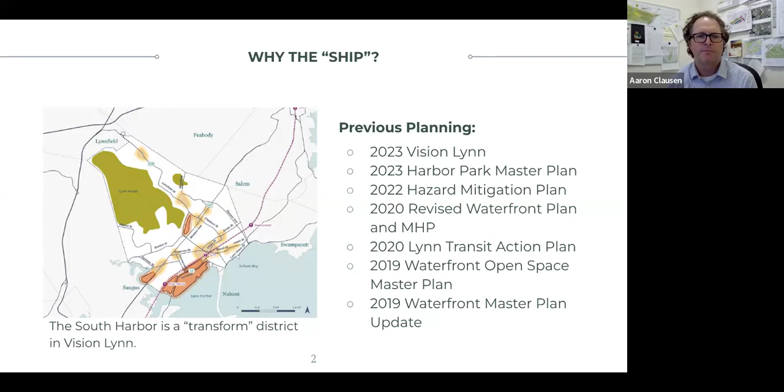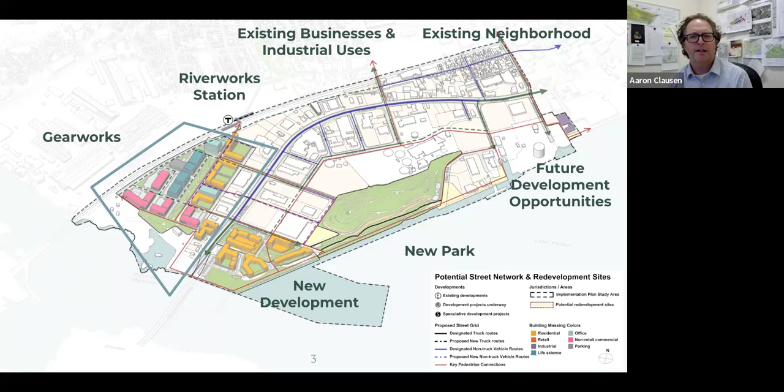The process, as I alluded to earlier, involved hiring Utile, a planning consulting firm that does this kind of work and actually carried out the Vision Lynn process for us. They've also hired subcontractors, Tetra Tech and Landwise, to look at infrastructure in more detail and look at the economics of this development, ensuring the strategy we're developing is feasible and considers those needs, so that growth happens in a logical way but is also feasible from a market perspective.

A lot of this work goes back to those previous plans I referenced earlier, to see what's still relevant, understand the context and history of this visioning work in the city, and then engage stakeholders, property owners, businesses, and residents to hear their desires and understand how their perspectives align with the visioning that's gone on, ensuring the strategy is consistent with the community's needs and wants. We've done this through community meetings, neighborhood walks, and reaching out directly to stakeholders for one-on-one conversations to make sure we're getting a diverse perspective on how this plan gets developed.

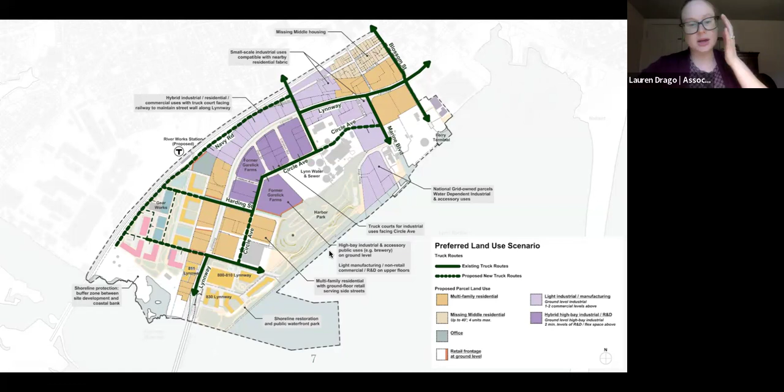You have the Harbor Park, which we're currently working on. And then these orange pieces of property — these are what we consider development opportunities in the area. For the most part, these are privately held, so it's up to what the private owners would want to do with their properties. But the idea is that when those redevelop, through zoning we would be supporting multifamily residential on these parcels.

And then at the same time, for these purple parcels here, we envision a more light industrial manufacturing use, which would reach the goal we've talked about previously of bringing and keeping more jobs in Lynn. So we're not trying to lose all of the commercial or industrial that's already in the district — we're trying to preserve that. But at the same time, having a framework like this helps make sure different uses like residential and manufacturing can support each other, not lead to conflict. So it's about being mindful of these borders between different uses, and also about the scale of development we're encouraging through zoning.

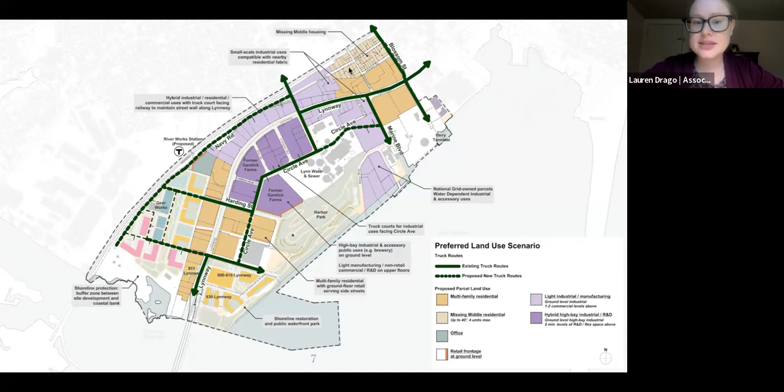This neighborhood up here is a lot of individual homes — single family, two family, three family — and we want to be mindful in the zoning that we're not trying to drastically change the character of that neighborhood, but preserve what's there and make it an even greater place to live.

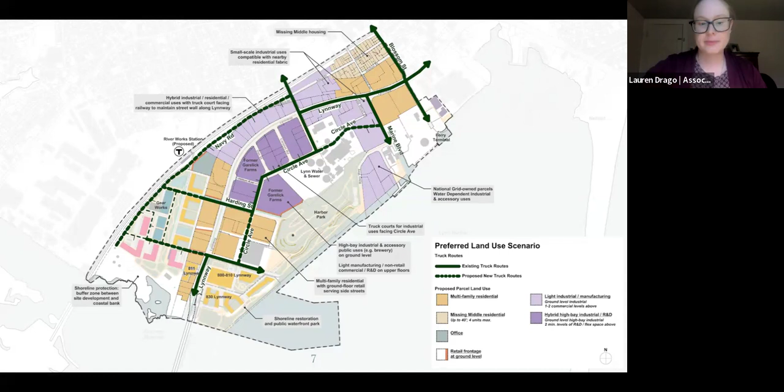The other aspect of our development framework that's really important to this plan is the street grid. To get back to those goals we talked about with safer mobility and easier access, anyone who's traveled through this neighborhood knows you sort of get stuck to the Lynnway. Everything has to go to the Lynnway to get through this neighborhood, and it's really designed to get you through the city as quickly as possible. With all the congestion that comes up, that doesn't always happen.

This framework helps us think ahead. It helps us bring back streets that used to exist but have previously been decommissioned, and it helps us create a stronger street grid that makes it easier for folks to get around on bicycle or on foot.

As you can see here, we've also been mindful about the fact that we're talking about industrial uses in this area. They're still going to require really good truck access to be successful here, so certain streets need to be designed to accommodate that. But as much as possible, if you can get those trucks off of the Lynnway, it should improve congestion and should also improve safety for everyone traveling through this neighborhood.

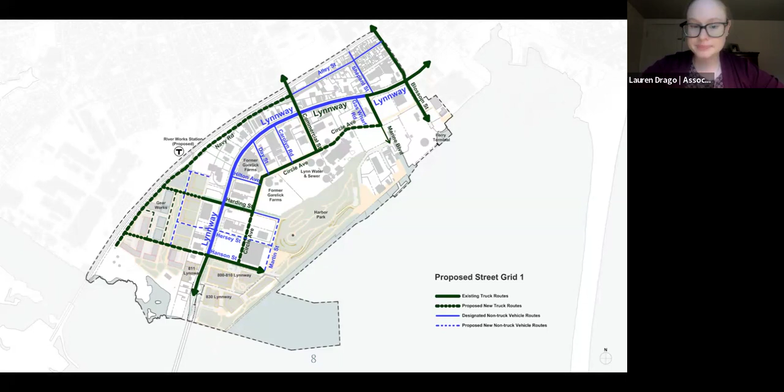So I teed up a little bit about some of the infrastructure needs and considerations. Aaron, do you want to talk us through more of that chapter? Yes, thank you, Lauren. As Lauren walked us through the framework, I think what's pretty evident is that infrastructure is a key component to help facilitate that growth and ensure that when that growth happens, it really is serving the community as best as possible.

Those are relatively simple things that we can address going forward through a number of different resources. But the underlying issue here is that the waterfront is well served by utilities, and that points to the opportunity for redevelopment.

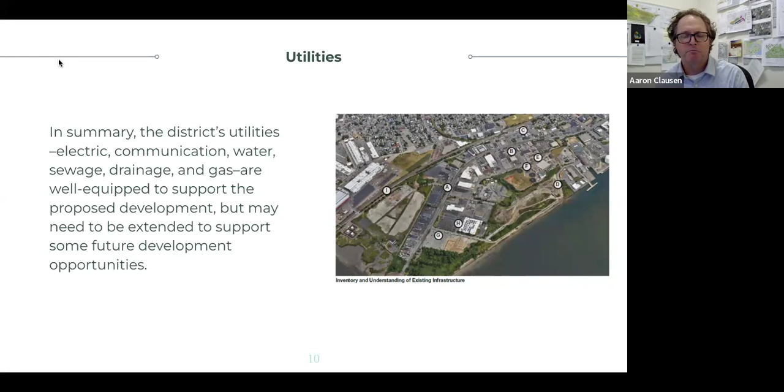The second piece of that is looking to the private sector through the local approval process.

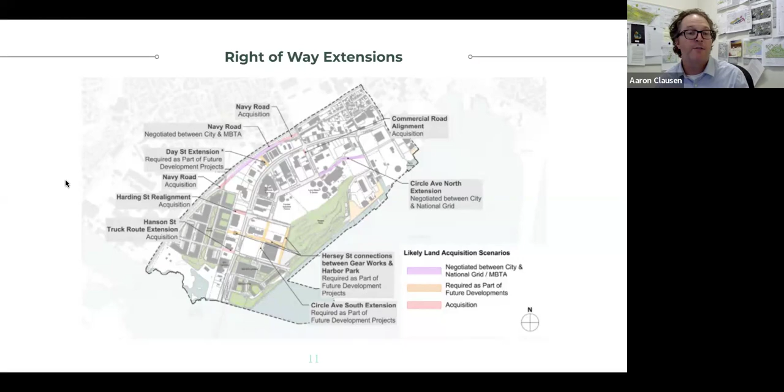This plan is identifying methods we can use to implement that and fund those improvements.

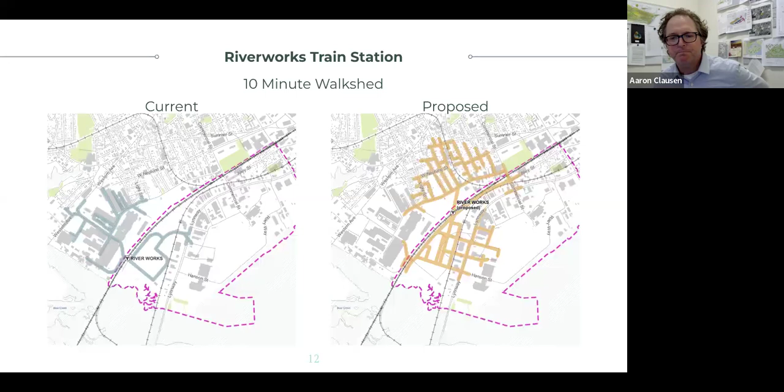Next slide, please. And I think that means I pass it over to you, Lauren, about how do we... Yes.

For the projects: completing Harbor Park, fixing the street grid in the ways we previously discussed, redoing Lynnway into something more friendly to different modes of transportation, creating that publicly accessible Riverworks station, creating deeply affordable housing, and fostering transformational residential and commercial development, mostly working with private developers to do so.

And then making South Harbor feel like a real neighborhood. Something that came out of Vision Lynn was that our community was a little concerned about the idea of unchecked development, and the feel, authenticity, and fabric of community when that happens. So we're thinking now about what kind of art initiatives and community programming we can do now to make sure it feels like a cool, interesting Lynn neighborhood once this transformational development continues.